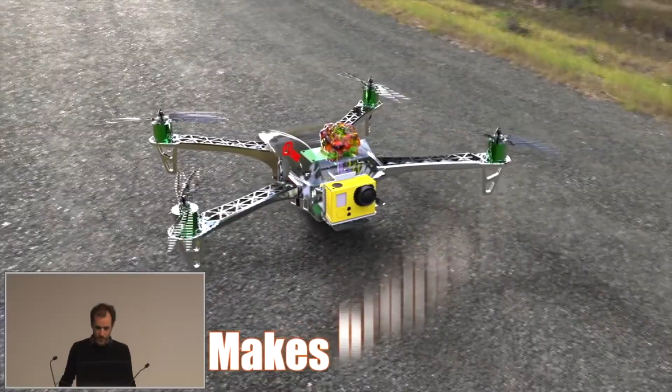So that's very briefly explained. This is the topics dealt with in a course of a semester or a year at EPFL. So yeah, it was a bit fast. Now let's see how it looks like nowadays using these simulation tools. So we are going to take a look at an example that is quite trendy. So a drone. What can we do with this type of models?

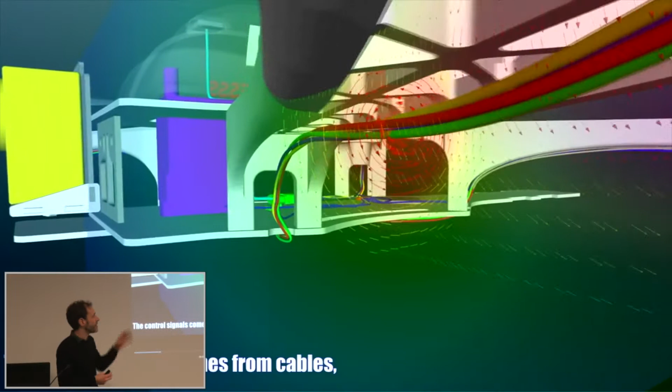So we can really represent all this. So okay, there is a bit of CGI to put all the physics results together, but all the colors are coming from the physics simulation tool. So we can start from every component, the motors, the wires, the electricity that is provided by the heart of the drone to the motors, the signals. So now we're reaching the brain of this drone.

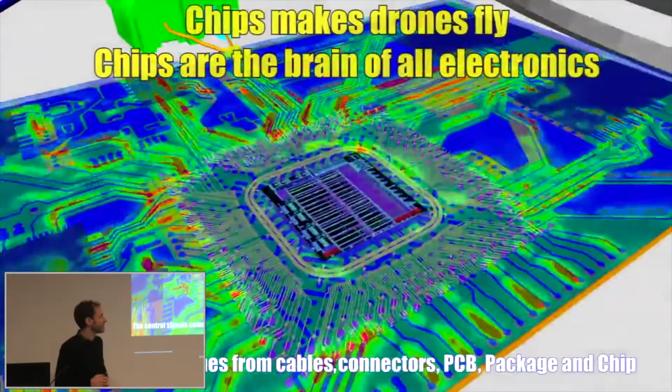And on the brain here we have several connections, so the PCB basically, and we can study all this in details. So the idea is to have a virtual prototype of this whole system. You see here all the impulsion, all the signals that are traveling from the board in the middle, the package, to the extremities of the PCB and then to the rest of the system.

The interesting stuff here is that, okay, you have to design a layout that is going to work without too much interference. We can also model the inside of this brain, of this package, and the coupling between the package and the PCB. And you see here oscillating waves that are resonant modes that would be parasitic for the PCB. So it's something you have to get rid of by adding capacitors.

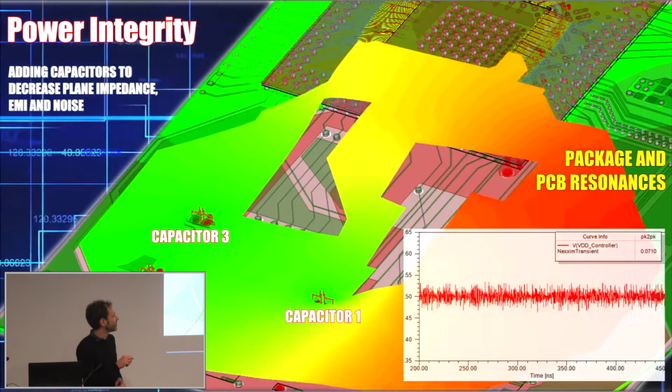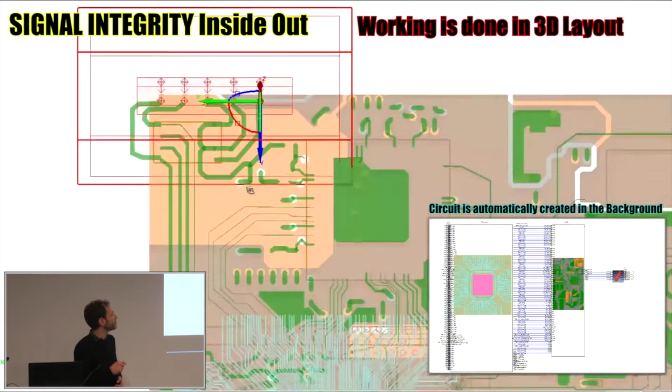You can really place them with the mouse in 3D, and the model is going to adapt. You see that we have pinned down this oscillating field so that we don't have this resonance anymore. So it's just an example of something you have to deal with when you design such PCBs. Here, someone is adding 3D components to the vias of this PCB, and we can look at the same time the model, so the circuit that is built by the software. We call this inside-out electronics.

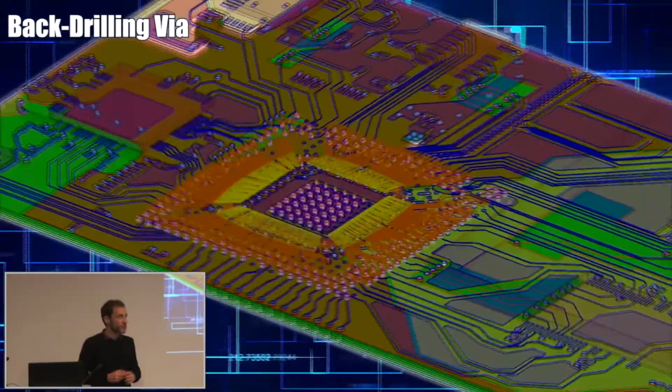We can follow also traces and look at the signal and make sure that the signal is really going to be readable, like bits, and if the eye diagram is going to be opened sufficiently for bits to be read, so that we don't have failures. If we have problems, we are going to pinpoint the locations where we have problems, and you can see here a via, we are back drilling this up to the level of the board, so it's through the board.

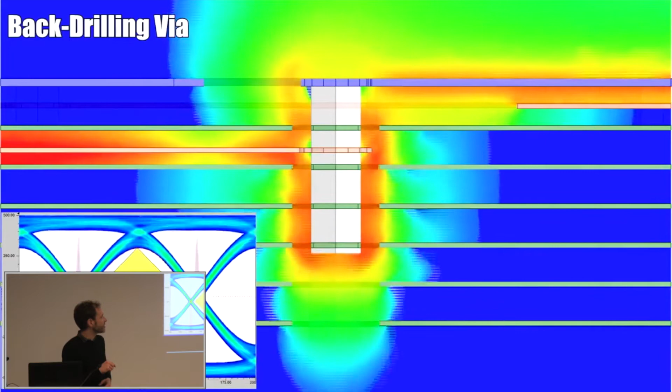And you see that while doing this the eye diagram is opening, so the eye is now sufficiently open, so you can adapt this. You can really make these small changes in the PCB in order to have something robust. We can study the power deposition, the temperature, the thermal stresses, so the structural stresses, if you have oscillations, if there is vibration, is it going to hold or not. The antennas, because the PCB has to communicate with the outside world, so you have a GPS antenna that is coupling with the low voltage data, so differential signals.

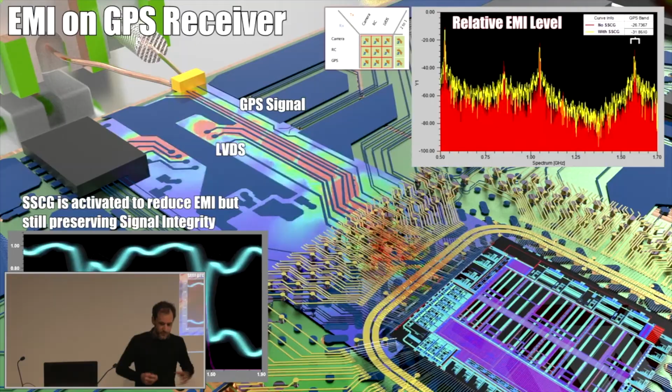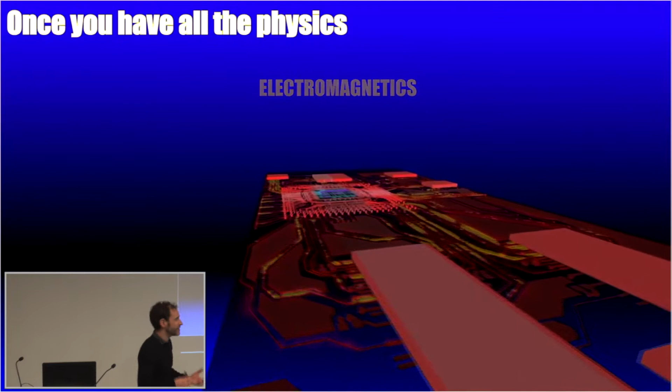You can try to see if you scatter this information over broader bandwidths, if this is going to be better or not. So you can have a compromise between electromagnetic integrity and signal integrity. So basically you go through each component of the system. For each component you go through all the physics, all the fields, the temperature. You see the cooling here from the air that flows around the PCB.

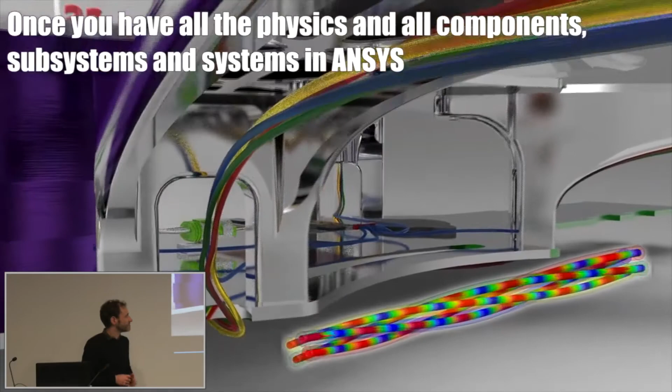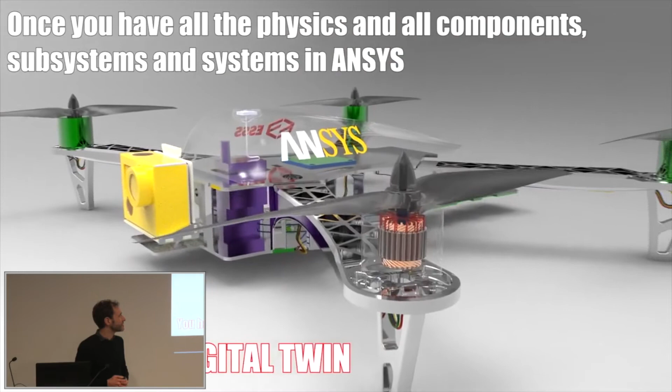And from these temperature fields, of course, this will have an impact on the conductivity, on the electronics, and so on. So that's really about making sure that this thing is going to work in a robust way in all possible conditions. In Siberia, in Dubai, different temperatures. Here in Switzerland, in rain. Is it going to work still? And so on. So many questions you can have answered on the computer in this kind of virtual simulations.

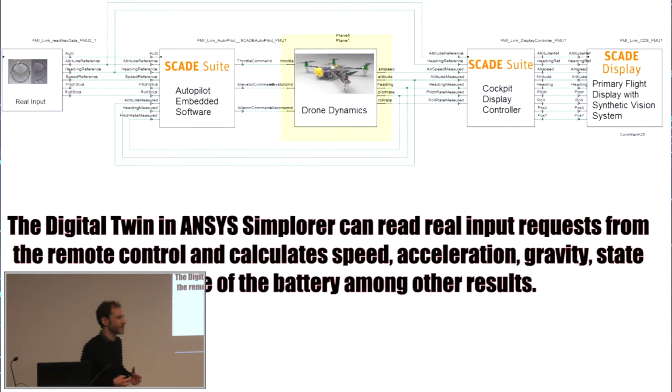Here you see the pattern of emission for the antenna communicating with the outside world. So is it going to couple well with the rest of the world, with your emitter, with an antenna positioned somewhere? And now we are going to deal also with the brain, so the software, the embedded software in this chip. This is something we can model as well. So basically here you have a full virtual system that you can interact with. There is a user playing with it.

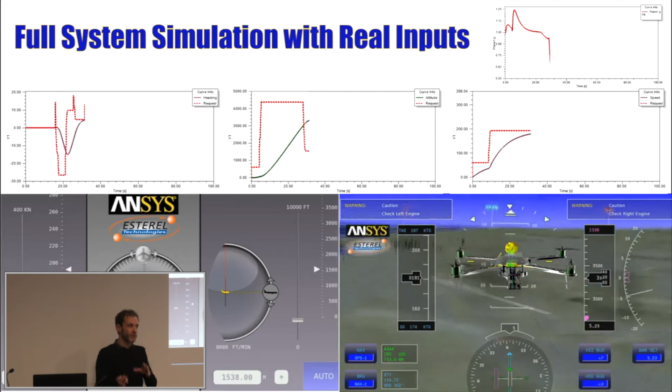So there are some commands, triggers, change the altitude, change the orientation, the speed. And you see here the reaction of the system, this virtual physical system. And you can just see if your virtual drone is working fine before even producing it. So the trend now for engineering companies is to plan something, find customers, and then only build it and sell it. So that's an idea, that's a business model. It's a way of interacting with the markets and making sure that you don't risk too much, you don't invest too much too fast.

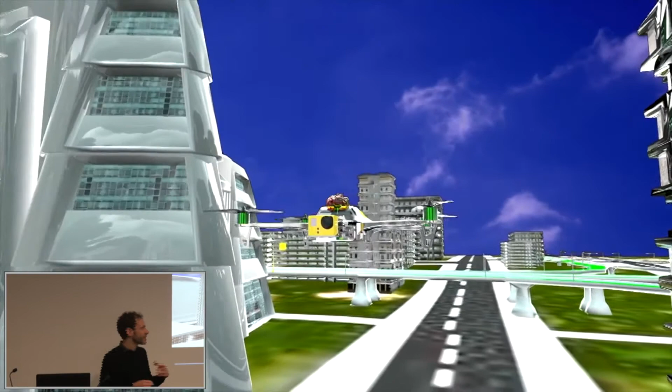But now what I'm going to deal with today is more how we can use this integrated into physical systems, so cyber physical systems, and how to use this type of models efficiently and make them also usable for machines themselves in order to take well-informed decisions. Am I going to fly between the buildings or hit the building and so on? So you can simulate all this, that's nice, but you can also train your artificial intelligence with this type of things, because we've seen the human could control this like a video game. It's a very expensive, complex video game indeed, but you can also use this with artificial intelligence, which is really the interesting topic today. So we've seen a digital prototype, so that's one thing.

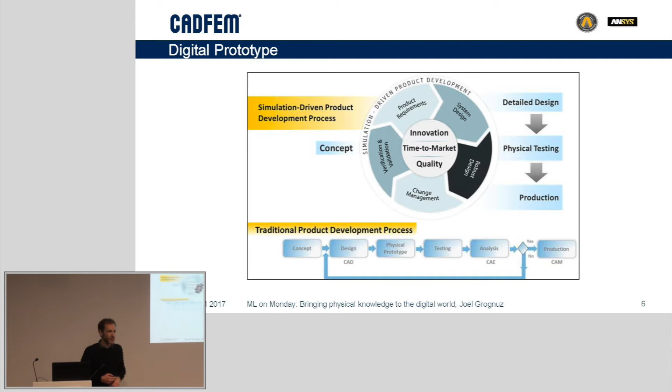That's the traditional way of dealing with engineering and science. You plan something, you have assumptions, you model them, you check the model with measurements, and then if everything is fine, you produce. So that's the old-fashioned way. Now, the new way, actually you are still doing this, but you are using this work, because this is a lot of work. You've created the models, you've created a digital prototype. Now you are going to still keep it and connect it with your physical assets. So it's basically the feedback from sensors in real life, from a system, from a component, different sensors.

Here you see a power plant, a gas turbine, so it's something quite big. It's no longer the simple drone, but it works in the same way. You acquire all this as a part of Industry 4.0, so the idea is to have more feedback from the physical world and bring this together in what we call the digital twin. So this has the advantage of being able to have smarter products doing predictive maintenance in order to have really efficient products that are not going to cost too much to maintain.

If you take this example, I think you recognize this in the Gulf of Mexico. This was the old time when humans had to take decisions, well informed or not well informed. Now there are some companies who have a vision to make it more efficient, so we go a bit further with the assistance of machines. And the idea here is to have smarter machines than just this one, or the paper and pen, which is still working, is going still to work. Here we are trying to go one step further.

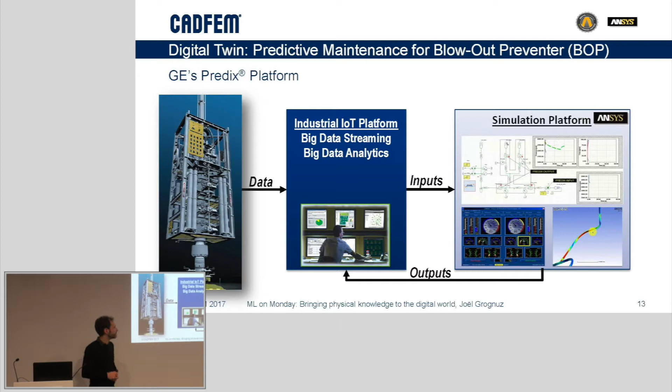But usually, if it's well built, you are going to have a way to extract more information than just what the sensor tells you. Reading the pressure at different locations, you might be able to see with the fluid simulation here what is the actual fluid state in this area. So you have the outputs coming back, and then you are going to take decisions.

Another one that is a bit smaller, it's another company who is building compressors. So it's actually a compressor that is sitting at the entrance of ANSYS in Canonsburg in the United States. And it's used as a demo object, a smart object now. So we call this smart because it's plugged to a human-machine interface. You can read all the sensors. You can see here they are displayed on top of the image of the machine.

You can connect this to this kind of digital twins. So actually the simulation model that is going to tell you the dynamics of the compressor. There is some fluid dynamics analysis, and you're going to be able to take decisions: should I open this bypass valve, another one? How should I tune the valve so that this compressor runs in the best possible way, depending on the loads placed on the compressor, because you can never anticipate in advance all the possible load cases for the compressor.

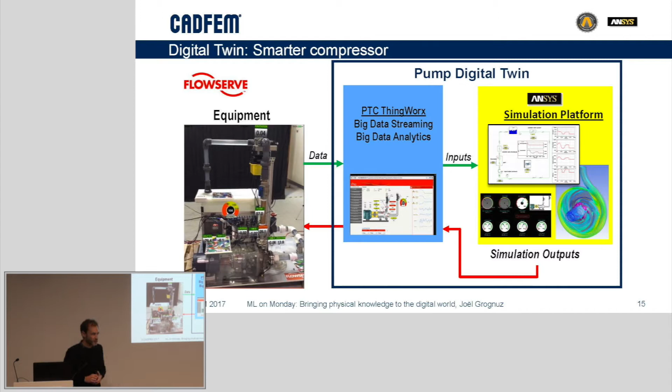It's plugged to something, a black box, that is the system beyond. And here, based on this kind of predictions, you can actually optimize the tuning of the compressor and feed this back, change the settings, and then run in a way that is going to be safer for the compressor or more optimal. So that's an example.

Another one, turbine on a turbo reactor. That's another way of having this kind of predictive maintenance. So recuperating data from the field, analyzing it, taking decision: should I maintain, should I do something, or should I leave it running? And this is something that is very interesting, because this is really a disruptive change in the way companies are dealing with their products.

So now it's no longer a turbo reactor. This is air transportation or flight time that you are going to sell. GE is doing that, Boeing, Rolls-Royce is no longer selling motors. They are selling the motor, they are not free, but they are selling maintenance and flight time. A pump is a fluid transportation device, so you transport fluids and you ensure that the thing is going to work. Taxis, ground transportation, and so on and so forth.

So this is very interesting, I think, and very positive for the future, because this is a virtuous circle. Since the companies are going to be willing to have more robust products that last longer, so they have success, robust products, and less maintenance and waste. So it's for the better. You are not going to program the thing so that it fails after a few years, just after the warranty. You want to maintain this. So I think it's a very positive paradigm and a new way of seeing these components.

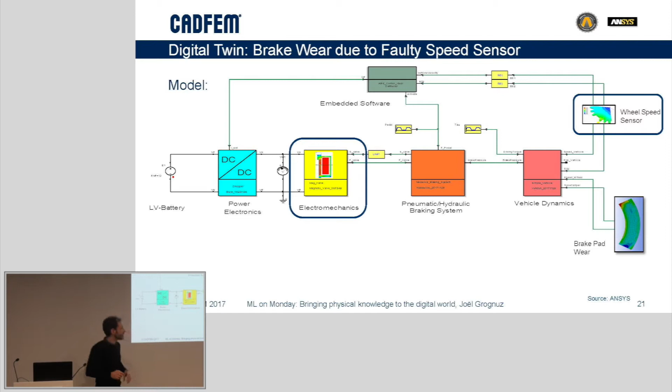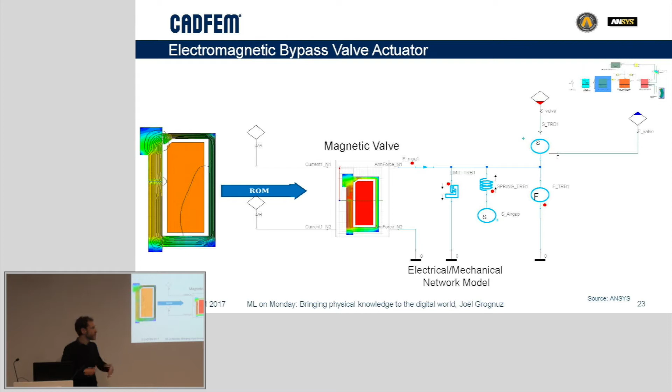And now if we look at the model for these braking pads, it's not only the pads, it's the system that controls the pads. So you have the power electronics, the electromagnetic actuator that is closing them, the pneumatic, the vehicle dynamics, the wheel speed sensor that is tracking if the wheel is running and at what speed, and the brake pad itself. If you look at these two blocks, you can see here a magnetic simulation of the closing of this actuator linked to other components. So that's one important piece of equipment.

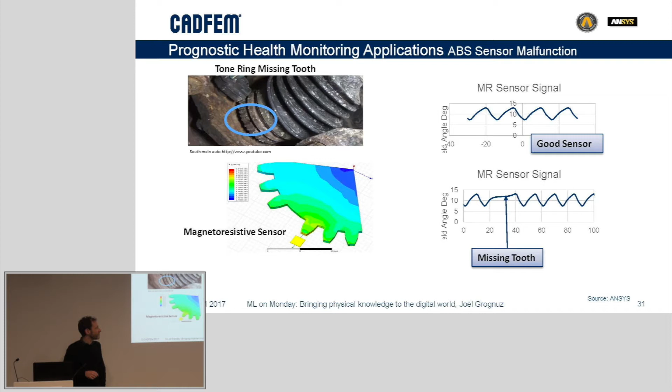The other one is this wheel that is actually a counter. There is a magnetic sensor here that sends a magnetic field and reads the change of permeability in front of it, so it's basically a coil with a magnet. It reads this out, and depending on the change of signal, it gives a velocity for the wheel. What is important now is that there are some insights the human has to give to the model or the machine. We know by experience that these tend to break. We can lose the teeth of this toothed wheel, and if a tooth is missing, then the signal is going to change, obviously.

And now when you have an assisted braking event, you are going to actuate on the brakes, trying to brake the wheel without ever stopping it. When it's working properly, that's the way it will look. The vehicle speed is going down to 0, it's stopping. The wheel speed is going down continuously as well. The wheel is going to slip slightly, and just when it starts slipping, it moves a bit further, because the valve is going to oscillate to counteract the sliding of the wheel. So that's the ABS working properly.

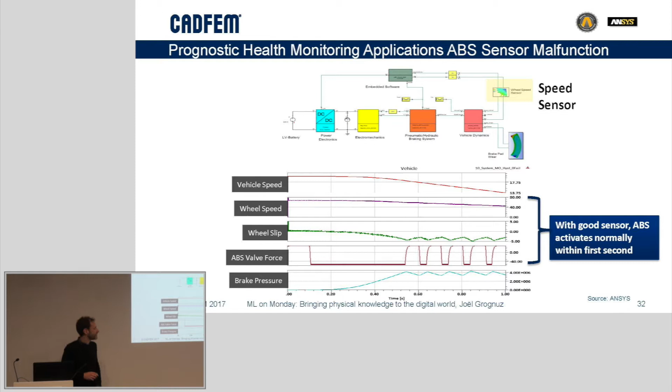When you have a missing tooth, then you have this problem that the wheel speed is going almost to 0, because it misses the velocity measurement of the wheel. And this is not so nice, because the valve is going to see harsh events that are going to impact the wear of the brakes. So there is some slip here, the brake pressure, and you see if you miss 2 teeth at different locations, it's even worse.

So this is going to have a huge impact on the lifetime of the brake pads. And you can use that basically to trigger a change event, not only on the brake pads, but also on this wheel. Because if you change your brakes but you don't change this, then you are going to have your car run even longer and always wear the brakes out. So it's a kind of smart way with a very simple case, very simple model. So it's one digital twin, but then in the car we have many others.

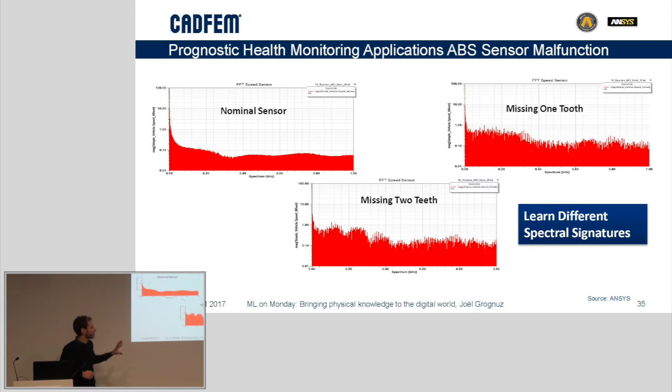And then when you have the information, you can infer the wear of the pad. You have a 3D model that tells you, depending on the pressure and the dynamics, how much wear over time. So it's something that is going to be increased. So cumulative wear or instantaneous wear is going to be accumulated throughout the lifespan of these braking pads.

Here you have another example, sensor malfunction. So the wheel is just braking and stopping. And you see that there is less cumulative wear. Okay, that's a simple example basically of a wheel that is no longer working properly with the ABS anti-blockage system.

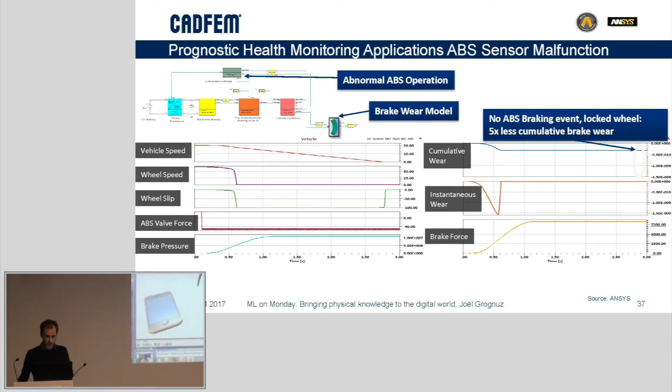I have another example here I can show you with, so basically another smart system. It's an interesting one because I took something that is really not so smart, and just to show you that we can make pretty much anything smart. The smart soccer ball. So what is the smart soccer ball? If you fill it basically with the same electronics as before, but with another functionality, then you can have the so-called smart ball.

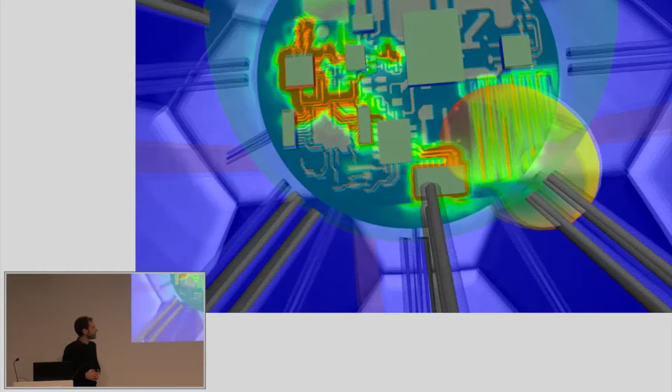So it's something that allows you to measure the position of the ball, the speed, the path it takes, the accelerations, if there is a goal or not. Just because of this electronics, it is going to communicate with some device, a watch, a phone, a computer, on the field. So this is something now that is used on the soccer fields, and that you can also almost buy from the market. There are some startups doing that as well.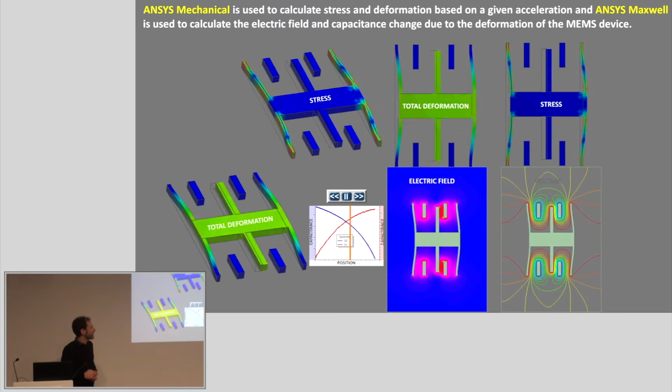So you see the acceleration sensor, so that's the modeling of the acceleration sensor that gives you a signal back on the electronic readout. Again, this PCB, is everything working fine? You can look at the pattern for the emission of the antenna. Is it going to communicate with my smart device, with my smartphone? Is that going to be fine or not? And then some additional physics around the ball. How is it flowing into air while it's spinning and so on?

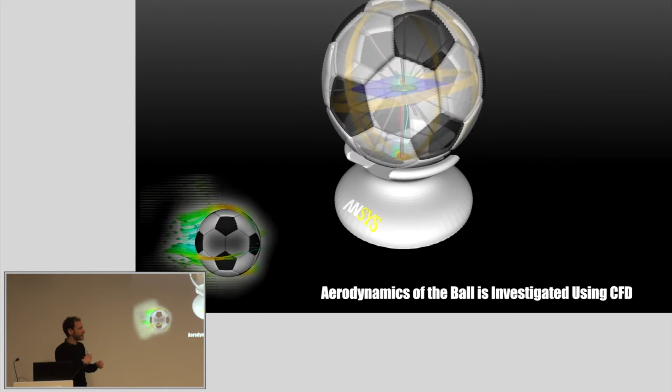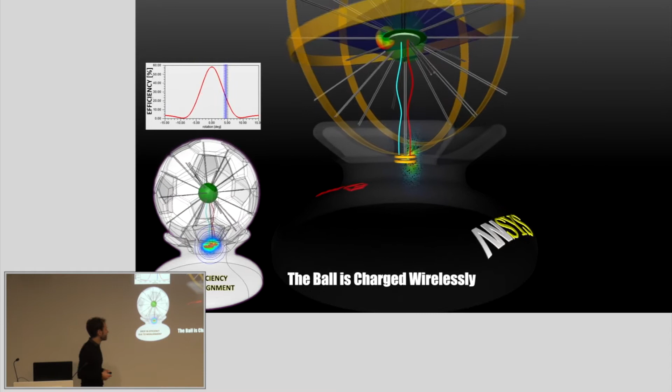So you can really predict even the trajectory or check the trajectory before the ball has reached the goal, for instance. Or here it's about just charging the components, the battery, with an inductive coil. So it's inductive charging, so that's basic stuff basically. And once you have this, you can plot the trajectory on your smartphone, see it in 3D, try to teach yourself.

Basically, it's no longer about machine learning, but about the human being that is learning how to kick this ball in the best possible way. And we can even think about an electronic that is teaching, a coach that is teaching how to shoot in the corner of the goal.

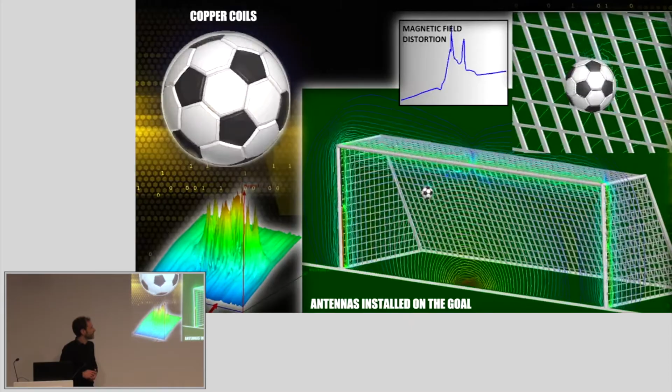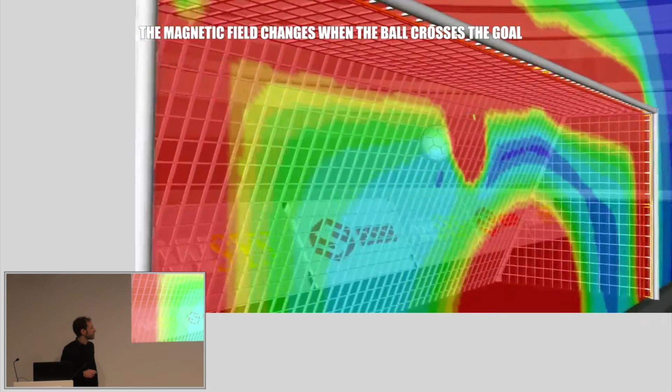You can see here the detection when the ball enters the gate, and you see here the magnetic field basically that is impacted by the passage of the ball, and the device that is going to be reading out that the ball is really in the goal. So there is no possible discussion. And sending this information to an antenna, to a relay, and to the rest of the electronics. So you see the ball itself is a system, and then it goes beyond.

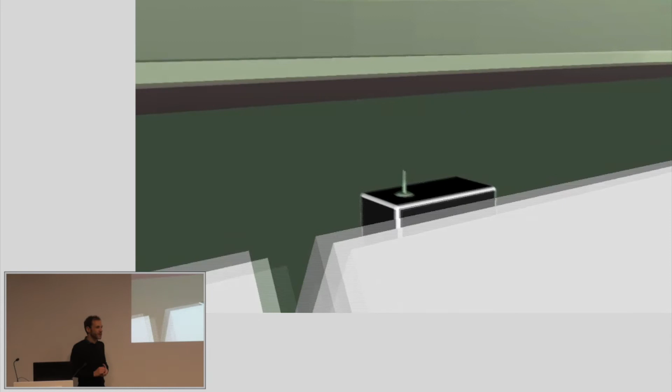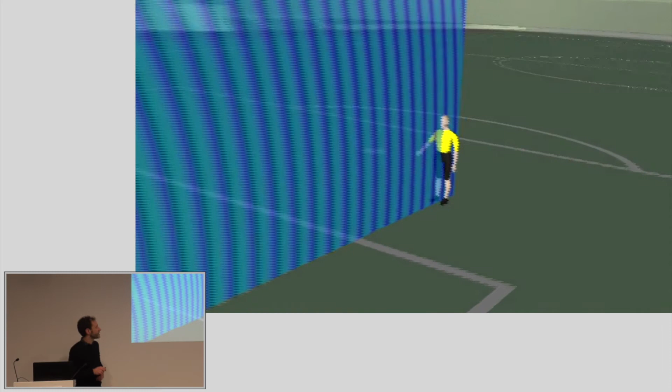Everything is interconnected, and that's the interesting stuff and the very exhilarating new developments with all this type of smart objects interacting in the Internet of Objects, Internet of Things. So you see here, he receives the information, oh yes, there was a goal. Okay, at least the human-machine interface here was not complex to create, it just says goal.

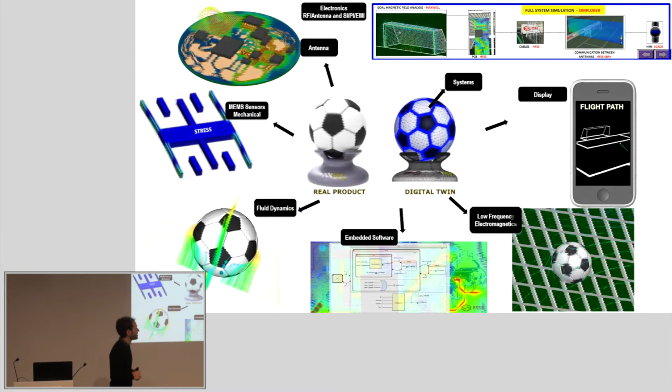So you see here, for this very simple example, all the possible places where we are using simulation, or our customers are using simulation. And now, of course, you can think about other applications. There is no limit, basically, and this is the typical kind of thoughts and reflections that are going to define what we are going to do as engineers in the future. This is my point of view, basically. We are not going to be doing the same job in the future as now.

Thinking wider, putting these things together, and answering this type of questions, or letting the machines answer this type of questions for us. So the digital twin, or the machine that is willing to learn, has to be able to answer this type of questions. What happened in the past? What could happen in the future, given a sensor readout? What should we do to improve the device, to change something, or to optimize the running of the pump, of the compressor, of the ball?

Having advice for the user of the smart soccer ball. Okay, please try to shoot slightly, so 1 millimeter to the right, in order to gain a few meters at the goal. I don't know, these kinds of things, and visualizing the curve of the ball, or just adapting to what the guy is doing. The ball is not active yet, it's a passive device. That's good, because otherwise we would have a few problems at the end of the match if the ball could be able to impact the trajectory.

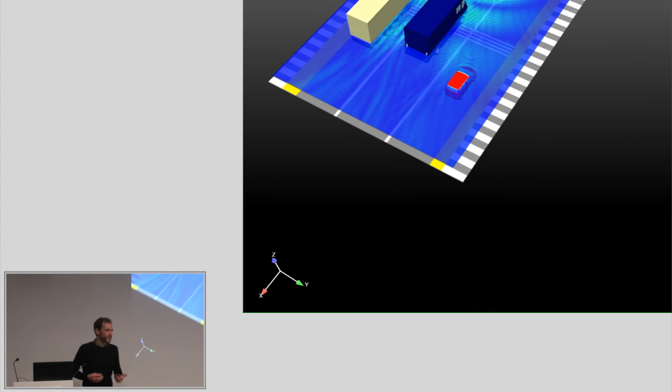So the idea now is to see, if I take another example here, that would be the automotive industry, what the machine could see that we never see. Basically, when you are on holiday, you are driving to France, typically through the péage, and you see the car is arriving, and this door is going to sense the incoming car and charge you some money for the trip. So that's the simple thing that is already working, but now we are trying to make this even smarter.

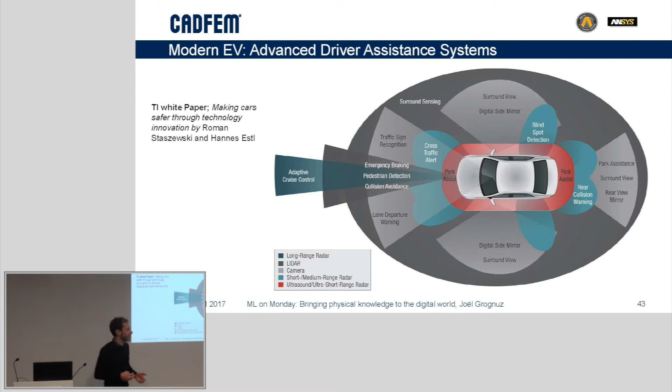So we want the car to be able to drive itself on its own. So we are adding all these sensors to feed the machine with the relevant data. So you have the central computer and all these sensors, different wavelengths, different ways of interacting with the world. So the adaptive cruise control is something you can have now in any new car, just keeping the distance with the front car, and all these other sensors sensing the area around the car, high frequency or acoustic for the park sensor. So it's something that is in almost every car at the moment.

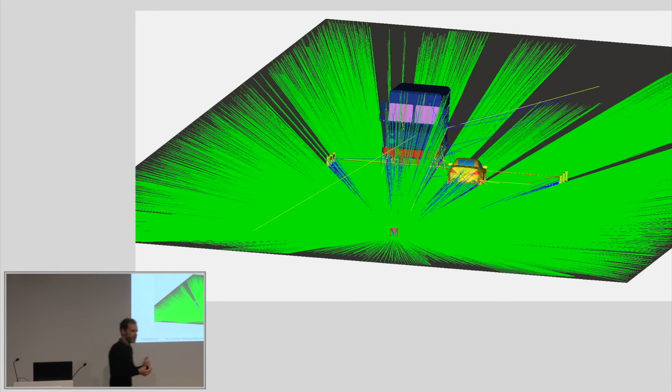But now the question is, how can we go beyond just parking automatically, to also driving automatically? So here we see in the software how this kind of crossing event is dealt with. We launch rays, basically, because we cannot calculate these electromagnetic waves with small wavelengths over such a big model. So basically we are going to interact with the so-called shooting and bouncing rays. So it's no longer exactly the finite elements modeling I was speaking about in the beginning, but it's just about sensing the position of a car, reflections from it for radars, for instance.

So if you see what the machine would get as information, here you see the range, the distance from the radar, the velocity from the radar.

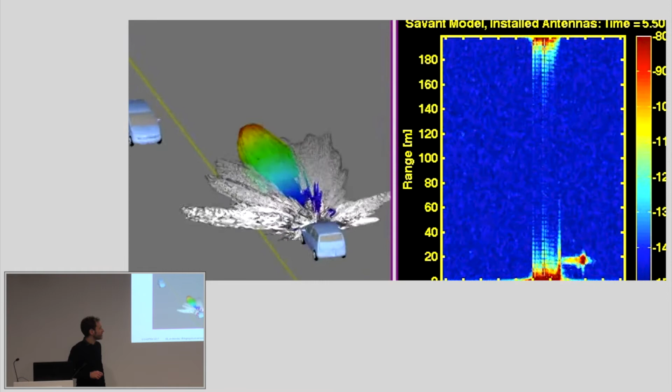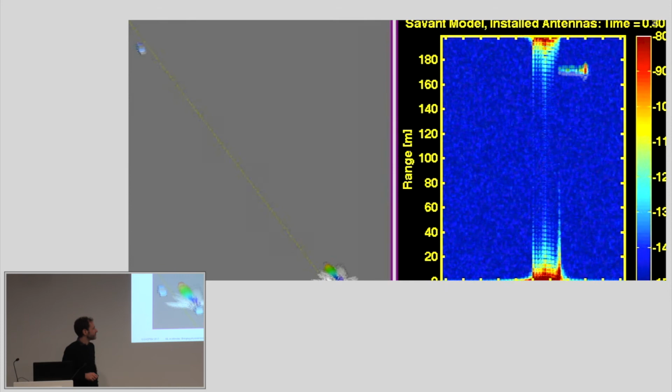So here positive is the car coming in front. So you see this car here that is driving at a relative speed of about 30 kilometers an hour. So sorry, meters a second. It's a bit faster. And here what you see is actually the reflections from the ground, because the ground is also moving towards the car. So you have these reflections that are actually annoying because they might hide details. So you have to fine-tune your radar, the frequency they are working at and so on, in order to have a clear view.

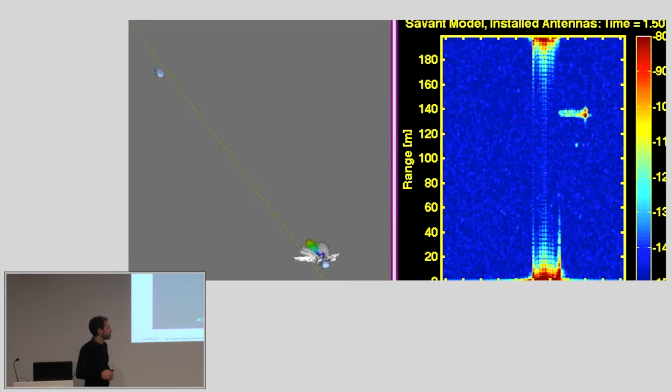Since the machine is not looking at exactly the same thing as what we do, we have to adapt with this other physics. So in a way the machine is able to see things we don't see. In another way, something that is obvious to us is going to be hard to identify for the machine.

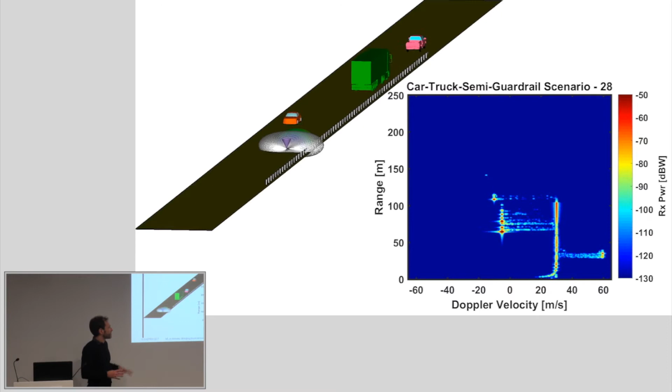And you see the other car coming in front with a positive relative velocity. So what you want to avoid is not this, but of course this as well, but especially this one, because this is the most dangerous thing in this configuration. So that's what is done with this type of analysis.

Different scenarios. Now you see the car in front, and there is a big truck carrying money, so it's made of steel, and it's going to hide the other car because the waves have to go around. So you see here the car is trying to communicate with this car. It's not only passively interacting with the world and looking at the world, but now it's going to speak with the other one because we have an Internet of Things, and the cars are going to speak together.

And you see that this has an impact on what the car receives. It has to understand, okay, there is some other truck coming in between. I have to brake a bit to keep the safety distance, and so on. So that's what the automakers are studying with this type of tools, the antenna, how it interacts with the world, and scenarios.

Another scenario, you can take the whole city as well. Drive through the city, there is an emitter that you are going to use in order to know your position. Since the city is full of waves, then you can use these waves for your positioning, in addition to the GPS. So you can fine-tune the position using any emitter in the city, and by learning what you have where while you are driving, you can actually refine your position.

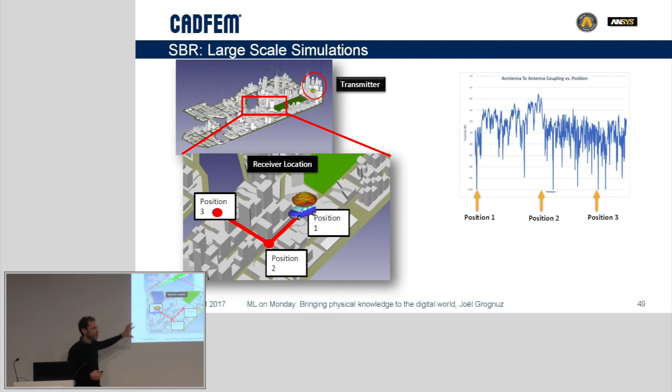We can see here actually the position, so the spectrum basically, and the amplitudes for different positions in the city from this antenna that is emitting. So it's really a way to go beyond what the human being can sense with this type of measurements.

So basically now if we look at large companies like Continental, they have plans, of course, they always have plans, roads, maps, which is good for this type of application. The name is well chosen. So you see here what we are doing now. They call these technical enablers for autonomous driving. So it's basically having the sensors, having all the feedback from the reality that is needed for the AI or whatever is going to drive the car here.

So basically there is obviously no axis here, so no information of year, and that's on purpose because I guess no one can really define when this is going to happen.

We don't have a model yet for that. So basically automation is going to increase. This is at least what they want to have happening. Fully automating parking scenarios, so we are already there actually. Stop and go, cruising, highly automated, so we can take the hands off the wheel, but for legal reasons, obviously you have to stay behind.

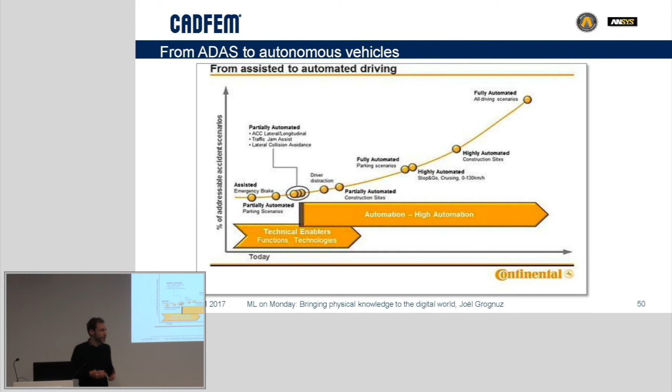Highly automated construction sites. Okay, that's for the production. It's more important, and then the driving, the autonomous driving. So that's the way they see it.

And now about the question of how much time do we need to have autonomous vehicles on the streets. We have different sources that are saying, okay, we need hundreds of billions of miles still to have enough data to feed or to teach an AI or to have something that is safe. Okay, that's a statement from one source.

Gill Pratt from Toyota is a bit more optimistic. He says 8.8 billion miles. But that is interesting, he says including simulation. It's not only measuring on the field, it's now having these scenarios in silico and having large clusters running with all these scenarios in order to train the autonomous vehicle.

At Bosch, they are looking at the money, so the expenditure for validation in hours, 10 to the power 6 to 10 to the power 7. So it's really quite a lot.

And we compare this now to what Google has been doing. They have these autonomous vehicles that they have been driving with someone behind the wheel always, but they have totalized 2 million miles, which is really nothing compared to this one. So at this pace, they started in 2009, so we still need about 40,000 years in order to fulfill this statement here.

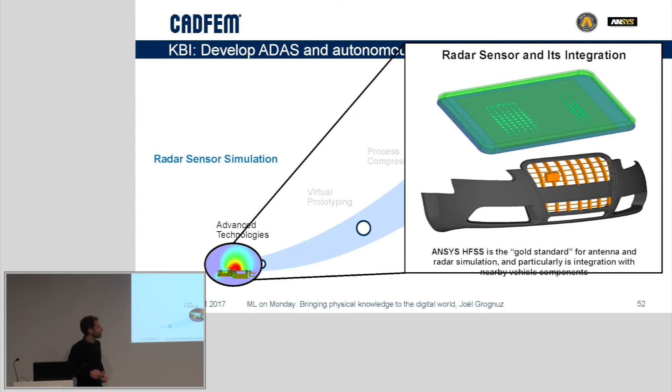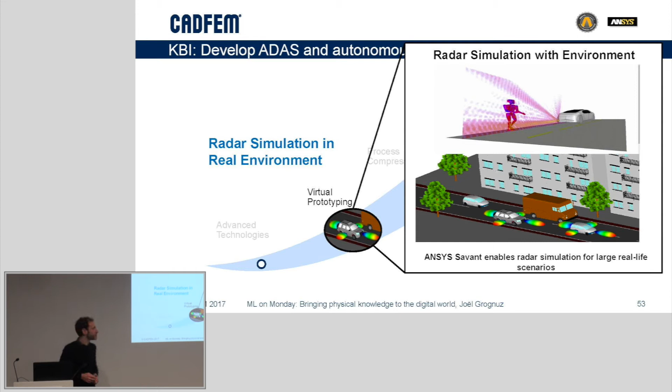And then we are looking also at the intelligence behind the embedded software. Of course, ANSYS has solutions for this as well, so you can program everything into this V development loop. So you are going to plan for the system, for the safety, for the architecture, for each component, and then you are going to validate them. This is the typical V structure in production of embedded software. And this is able to communicate with the modeling.

So basically, within one company, they've built all the tools that are needed, and they are going to expand this because they've identified this type of development as really critical for the future. So you are going to collaborate dynamically between these and the simulation tools. So with this, you can have in silico the full loop for this advanced driving assistance. So the full loop looks like this.

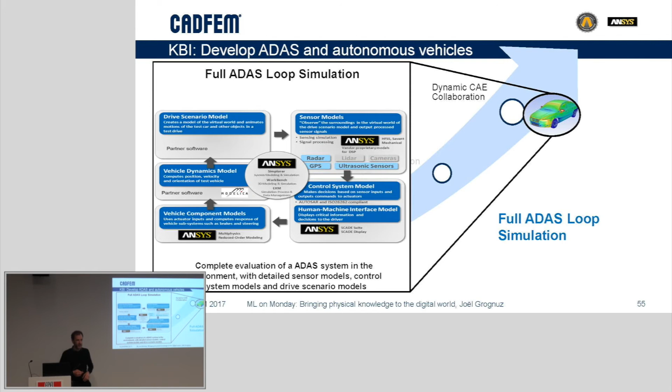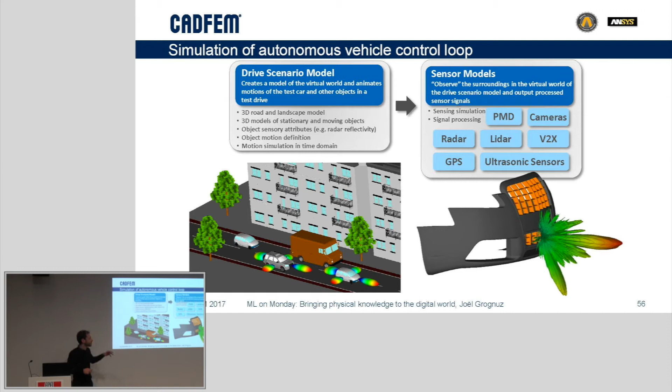So now if we zoom in on these types of things, okay, you have drive scenario models. So there is lots of work behind. So we start with these drive scenario models, sensor models. What does the machine really see? So we get this from the models. Signal processing, sensor, taking into account what the sensor can and cannot see, all the limitations in all possible configurations. The algorithm, human-machine interface, if at all still needed, at least for the testing.

The vehicle component, excuse me. And the vehicle dynamics models. How is the car interacting with the field, with the roads? Is it going to slide, to tilt, and so on? So you can really have these types of models.

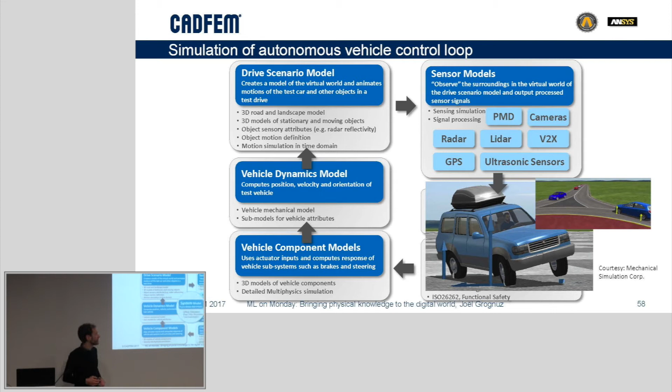You already have some low-level models. When you are driving a curve, the car compensates and drives you through the curve so that you don't go in a twisting figure, which is already very nice. So it's based on models. Here, we try to bring this a bit further, basically, with even more physics into the model and into the intelligence.

So if we look at the past, we have the analytics. So from the big data, we can get analytics. So that would be the first basic step. And then the idea is to leap, to add physical meaning to this data analytics from these models, in order not to have to train the AI in everything, because okay, you can teach a kid, or you can let him teach himself. He might have some problems, he might fall, injure himself, so it's the dangerous path, letting the kids try to evolve on their own.

Or teaching the kids with some models of reality: okay, if you touch this, you are going to burn yourself. Then they are still going to try it. But at least they understand quicker if you told them with a model first. So the idea here is to add these physics insights into this digital world in order to have a complete system simulation, to have predictive analytics, prescriptive analytics, and operational optimization. So here this is for experts, for alerts, anomaly detection, so this is what we already have.

And then it's going to speak also to the management of the company. I mentioned the fleet of cars. It's not even a car, it's a fleet of many cars. And there is a manager somewhere saying, okay, I see that we are investing too much now in brake sensors. We are going to increase the risk, fine-tune the analytics in order to change them really at the last minute. It's a bit dangerous. But if you have the proper tool, you might be able to do that.

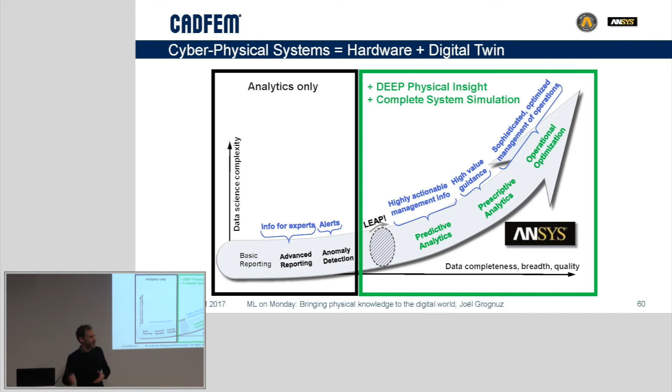Or you can increase safety of users for all these cases where the tooth wheel broke and that led to improper braking that led maybe to an accident. So you can really prevent this by the predictive analytics. Some things that would have been the one in a million, or in several hundred thousand, that went wrong. And okay, maybe it crashed, no one ever knew why, but it happened. So the idea is to be safer from this point of view.

There is a next step. Maybe the machine is going to overtake us and take us by the hand. I already have this kind of feeling when I take my smartphone. Sometimes, okay, it's not me guiding the smartphone, but it guiding me. Especially when I take the car with the GPS. Okay, that's already almost that. It's telling me, okay, expected arrival time, taking into account the traffic.

So the traffic made by all these other users, the Internet of Things, of objects that are traveling at different speeds, and basically these very simple speed and location measurements are going to predict your arrival time. So think about this for all types of objects we are using. And yeah, for the last step, when the machine overtakes us, of course it's a bit scary, because you can see now that machines can optimize themselves.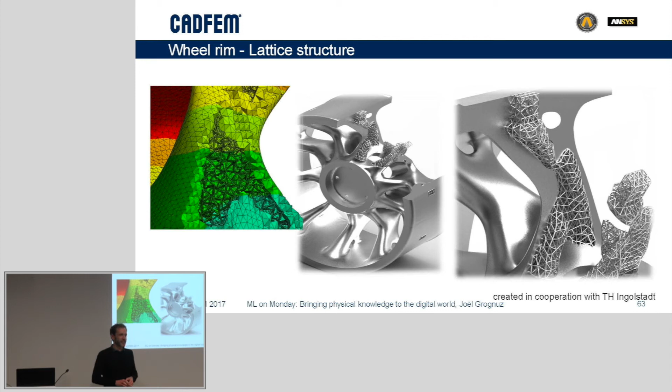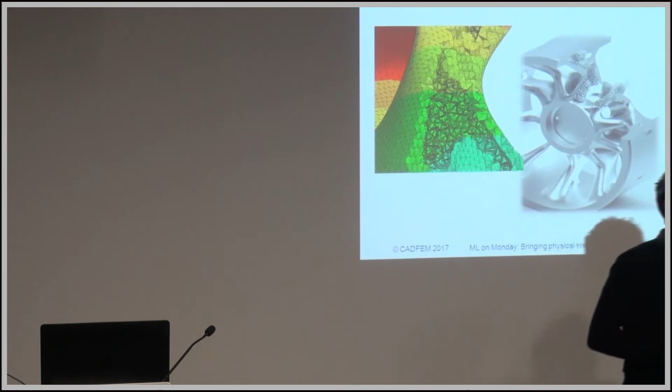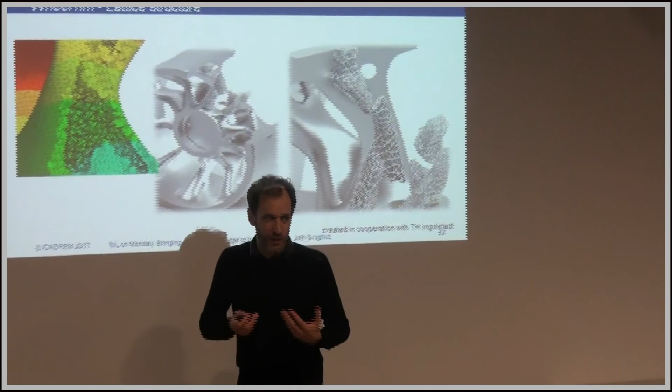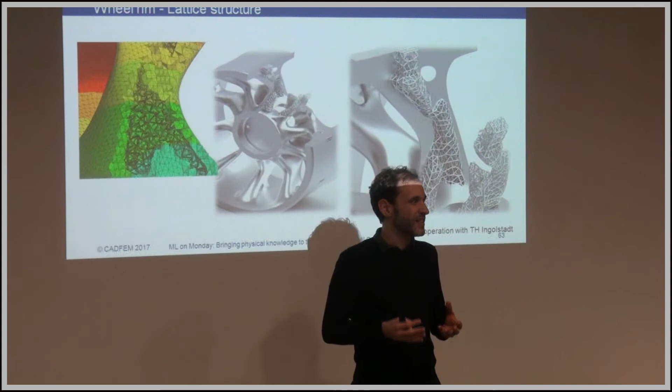You mentioned crash tests for the cars. So the answer is yes. And usually when the life of someone is involved and the test is possible, there would be validation of all the prototypes, everything. And then there will be only one pre-series, not even a prototype, but a pre-series that is going to be slammed into the wall. If we take the car, for instance, the crash tests now are done virtually in the software. You can see the car crashing against the wall.

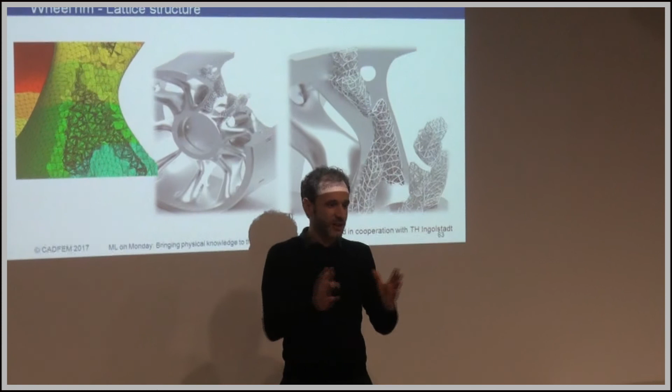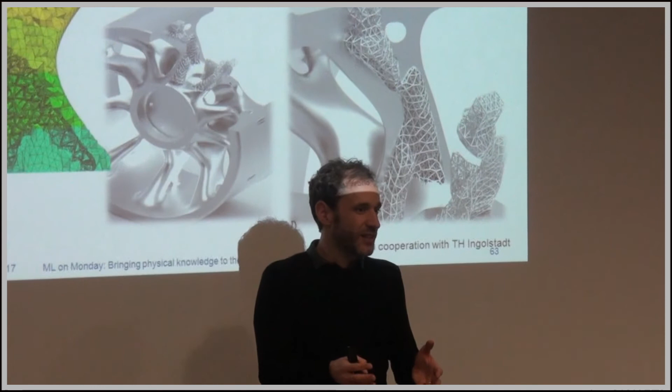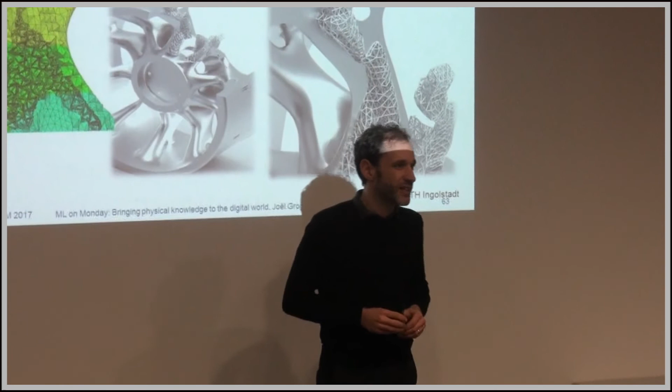You do these hundreds of crash tests virtually, and then you build a few cars from the series, basically. You crash them just to validate what you did, in order to see if the human has not made a mistake. Because of course the software just does what you tell it to do. And there is always a responsibility behind, so the wise human is usually checking what he did. So usually, yes, you can in a way assess something with the simulation. But usually companies still like to validate this with the last step. Just once, at least to be sure.

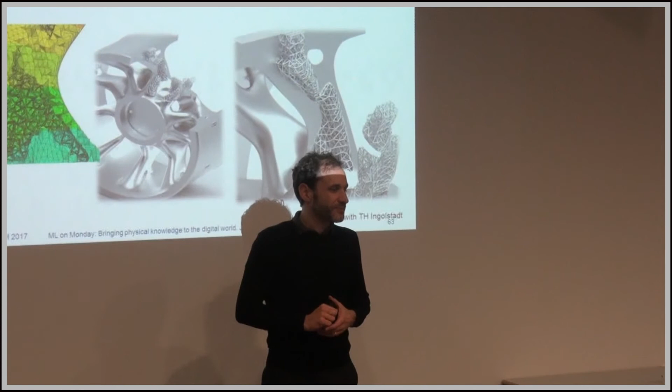There are some cases where you cannot really measure. So if you send a rocket to the moon, you are not going to test everything, or you cannot test the full launch and everything. So you test what you can, and you simulate the rest. So it's complementary. The question of measurement, simulation, it's always complementary. It's a tool like any other that you can use wisely or not. You can make mistakes with the tool.

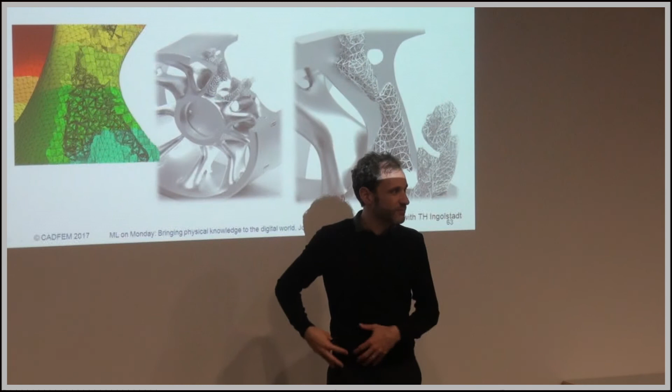But there are some cases, for instance, for implants in human beings, where the FDA is going to accept simple measurements, simple load cases that are not really what will happen in an implant. If I have an implant here on the leg, the tests are going to apply a force in a few directions, and then you simulate and you assess other load cases with the simulation. So you can do that. So this type of way of implanting something that is not possible to measure without killing someone, this is the case where you are going to rely on the simulation.

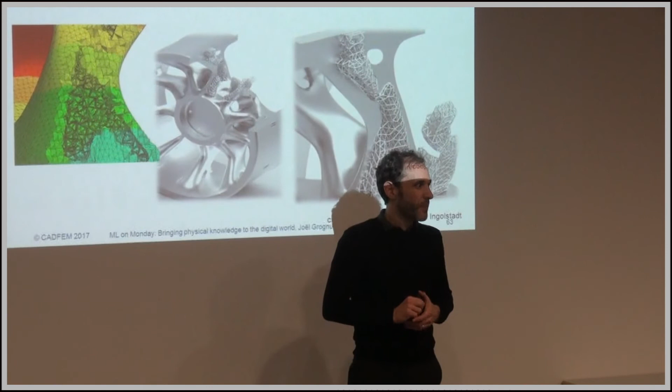For instance, a stent, an aortic valve mounted on a stent. So if you implant this in a human being, either he survives or he dies. So you are going to do this in the virtual world in the simulation. Then you are going to test on a pig. You kill a few pigs, and the size is quite similar. You have simulated, so you have good reasons to think it is going to be applicable to the human as well. And then you try it. And the validation is done through the several operations. So that's the kind of answers I can give now, or examples that come to my mind at the moment.

First of all, thank you for your presentation. I think especially this way of failure-proofing the systems, it looks very, very interesting what you're doing. And the only point I want to make is about this self-driving car, this ADAS project. The way I understood it, I'm not in the field, but I think that most of the modern approaches to self-driving cars are not actually using a completely model-based approach like yours. They are using a reinforcement learning approach. So they are trying to infer policies from outcomes rather than from a model.

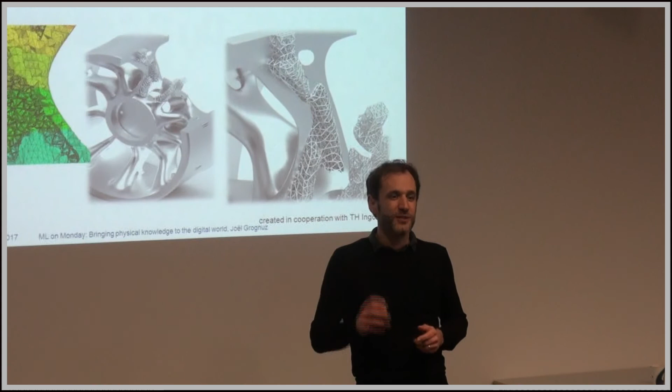And the idea behind this was to not have to have these complete models, these complete simulations that we used to have for many physical problems. What's the main selling point of your approach compared to these reinforcement learning approaches for self-driving cars? Okay, so for the ADAS, what is the main selling point of using a completely virtual model, the full loop in the virtual model, compared to reinforcement learning based on field measurements, if I understood well, plus the addition of the model. Is that right? Yeah.

So basically, of course, the presentation is orientated towards fully numeric and virtual assessments. It's of course a selling presentation. And the reality is of course a hybrid between both. It's complementary: as I mentioned, real-life measurements and model-based measurements, or simulations, are complementary.

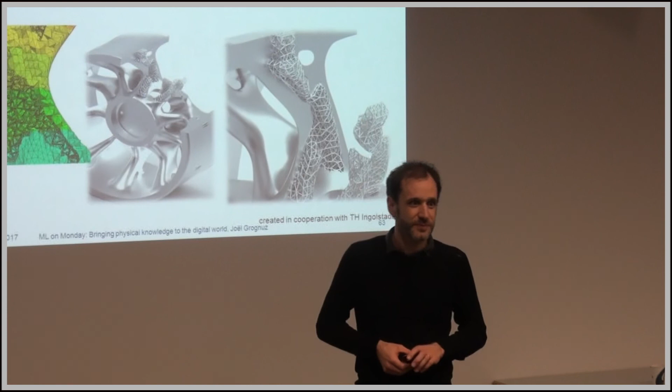I think the answer to that is very simple in terms of the mileage that is required to have all the data in order to have something that is fail-safe, that you want to send your kids in, and that is going to drive next to your kids. It's just so huge that you have to help a bit with these simulation-based insights. So it's not exclusive at all, actually. Regulators would be more inclined to accept self-driving cars if they are based on more simulations than strictly outcome-based or reinforcement learning-based.

I would put it this way. I think you measure everything you can. So it takes you 10 years, many hundred cars. And then anything you add for the regulations is always an asset when you have to defend your case, basically. You're going to fight to have a regulatory body that accepts what you are doing. So failing to use state-of-the-art tools is already a failure, because that means you could have done better. So it's trying to use all possible tools available and not only one. So of course, not only simulation, but also measurements on the field.

Because you are not going to think about every kind of event, like the plastic bag on the highway. Am I going to brake or should I go through? It's something hard for the AI to decide, and in addition for the model. Who has thought about the virtual plastic bag? So for this type of thing, of course, the field is crucial. As an engineer, I would not sign off something that is completely virtual, even if I'm doing this every day. We are interacting with companies and we are complementary. We are relying also on this field experience.

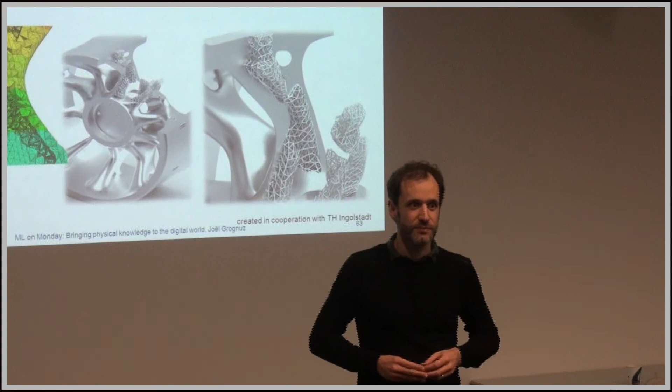That is fundamental, yeah. On the other hand, if you want to train a reinforcement learning-based algorithm, you will need actually a lot of simulations, right? Because you cannot train a reinforcement learning-based agent on the street. Indeed, it depends probably on the kind of sensors that you have. But yeah, for the first steps, naturally you need at least some kind of simulation, not an a posteriori simulation, but a much simpler simulation. And then probably the data that you would want to create for your simulation-based model.

Your reinforcement learning-based model. I'm not into reinforcement learning, but probably you would have a sensor on a car that is not driving itself. You would drive the car yourself and take pictures, and then use these pictures to train your model. This is more a supervised learning approach, right? Yeah, I see what you mean. You would have a simulation, sometimes naturally. So you can help the simulation world with the measurements, and the other way as well.